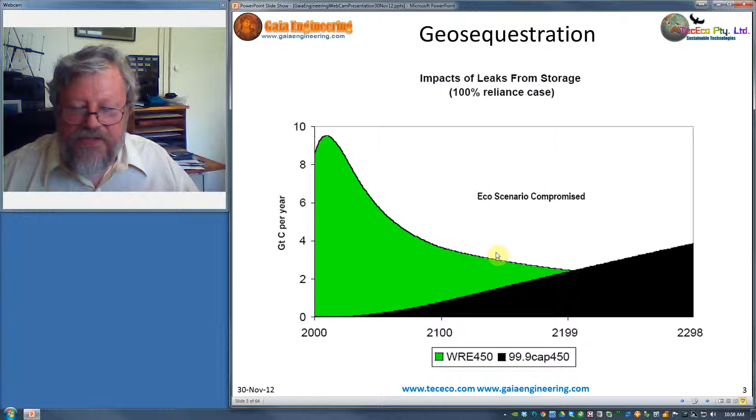As of 2011, according to Nature magazine, Peters et al., there are 33 billion tons of carbon dioxide emitted annually to the atmosphere from anthropogenic sources. Portland cement is a major contributor at 8.8%. Geosequestration does not look like it's going to work.

Leakage is the problem. I realized that the answer to the world's problems lay in an industrial ecology that utilized waste like CO2 and bitterns, desal wastewater or oil process water to create valuable products for the world's biggest market. By including the manufacture of not only TecEco patented carbonating cements but aggregates in the concept of synthetic carbonate building products, a solution to global warming could be found. TecEco have changed the technical paradigm in favour of making CO2 and other wastes resources.

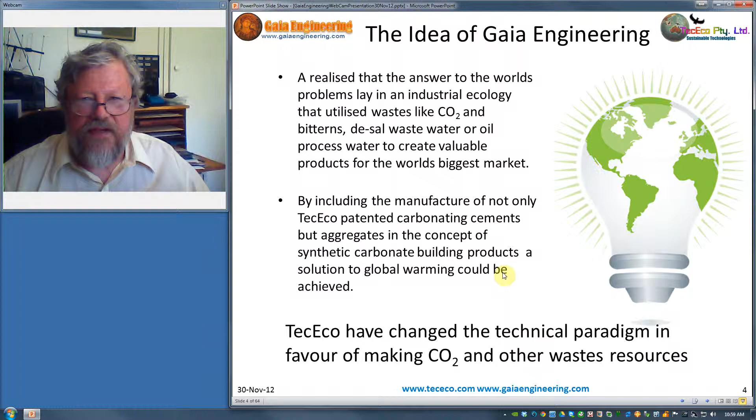I started back in about 1999. I was published by Fred Pearce in New Scientist in 2002. There is a way to make our streets as green as the Amazon rainforest. Fred should have referred to concrete. That's the only error in his work way back then, and the major change that we have made.

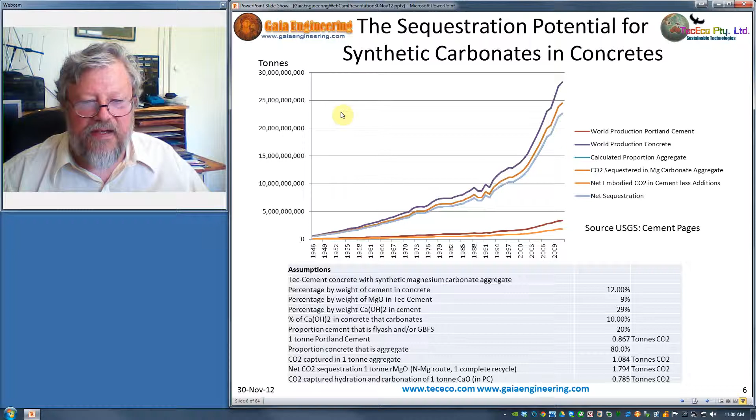Look at the potential. Over 20 billion tons, if you include aggregate, in our natural geomimetic process to produce man-made carbonate or synthetic carbonate. If all of concrete is synthetic carbonate, then the sequestration potential is absolutely enormous. You can almost solve the problem just like that.

A viable sequestration technology must be simple, scalable, have low upfront capital costs, low environmental impacts, produce saleable product into insatiable markets. Now, this is one area where we are different to all the other solutions. It must be easily implemented and deployable over a wide geographic area. Ideally, it should be symbiotic. It should conform with the rules of a good industrial ecology and address more than one of the major problems facing the planet. Utilize wastes from many sources and produce outputs that can be utilized.

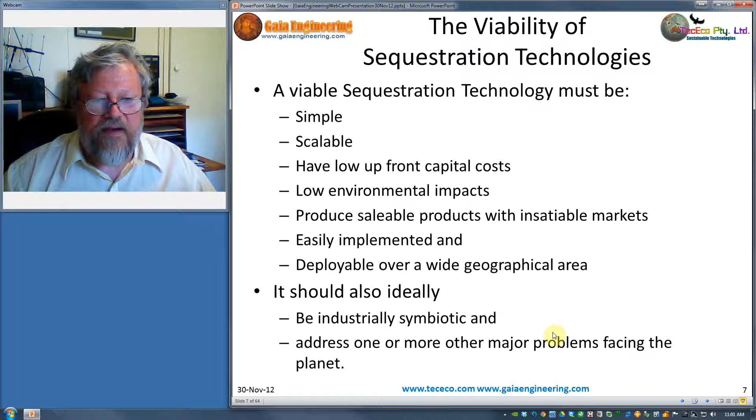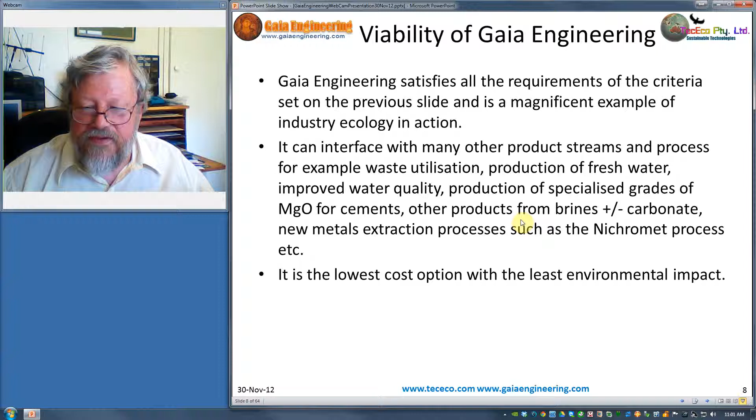The built environment represents what we do on this planet. It is large, an insatiable market for our product at the right price. Gaia Engineering can address other problems such as waste utilization and producing cleaner water. It achieves the maximum theoretical sequestration from concrete. Our Tec-Kiln and our Mg cements have patents or patents pending.

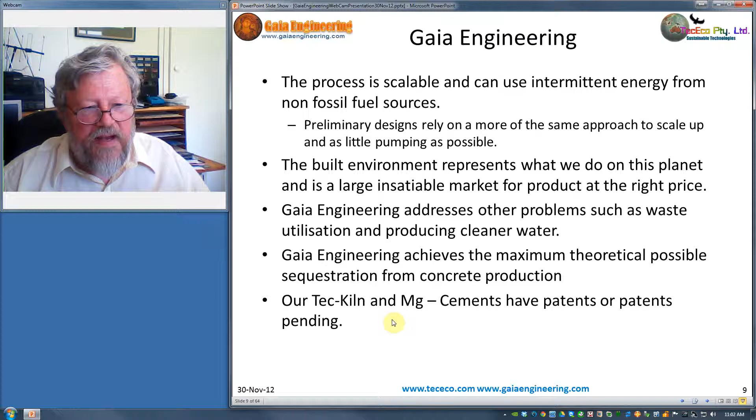It involves no mining, no transport, no grinding, and it does not utilize silicate like the other processes do. It's potentially much cheaper than these old processes. There are no wastes produced that cannot be used or recycled. Costs are not yet being developed, but they should be much, much lower because we don't have all that process.

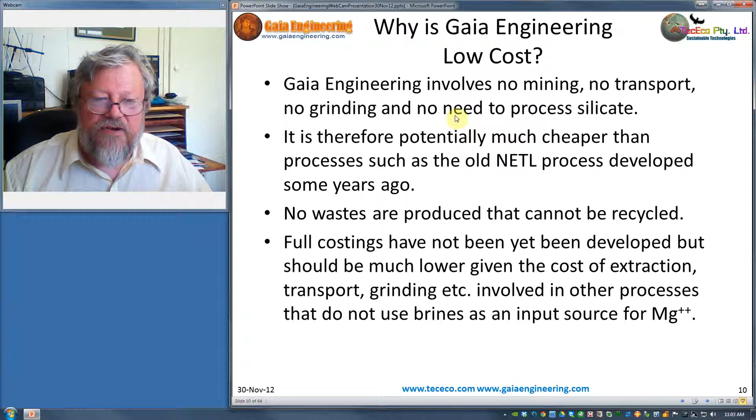Think for a moment about carbon sinks. Sorry, going back to that. There's no mining, no transport, no grinding, and there's no need to process silicates. That's the point.

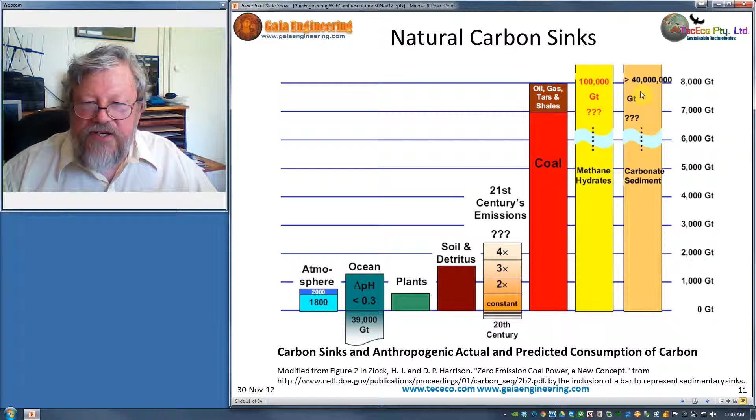Think about nature for a moment. The natural sink is carbonate sediment, over 40 million gigatons. They're permanent. We've got a choice, calcium or magnesium. We've gone for magnesium because of the low molecular weight. It's ideal for scrubbing CO2, and again, because of the low molecular weight, you can sequester more carbon dioxide.

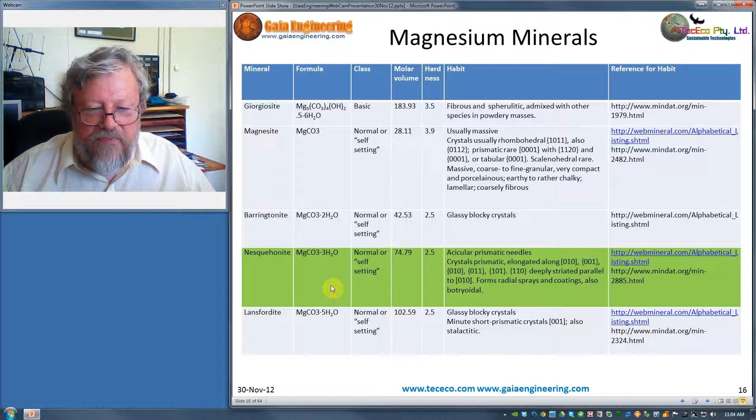It's the 8th most abundant element, and if we run out of waste like desal wastewater or oil process water, we can always use seawater because there's 1.29 grams of magnesium in every litre. Has low pH and polar bonds. Ideal. There are a lot of magnesium minerals. We've chosen nesquehonite. A lot of reasons for that. It can be manufactured in our N-Mg sub-process at room temperature.

There's significant molar volume expansion. Excellent morphology: long needle-like crystals that add to microstructure, and strength of a composite like concrete's all about microstructure. It can be used directly in acoustic panels, insulation, etc. It can be used as an input source for the manufacture of man-made aggregate. It's stable over a wide PT range. It's suitable for an input to manufacture MgO, our binder. It has low pH and polar bonds.

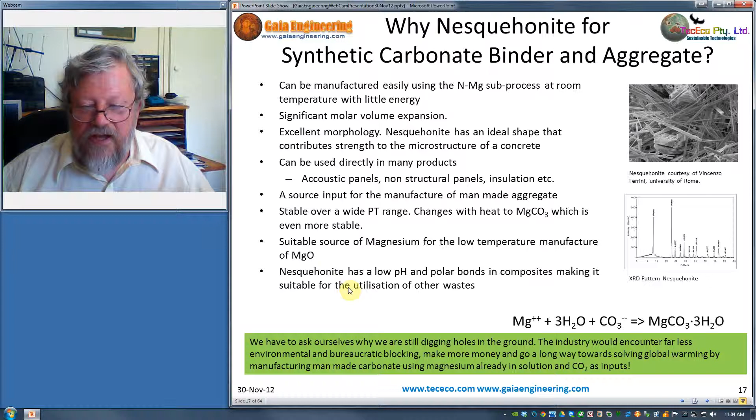My colleagues Vincenzo Ferrini, Silvano Mignardi and Caterina De Vito at the University of Rome, La Sapienza, have developed a process based on some early pre-World War II patents, and also on some recent publications in the 70s by scientists from the DOE.

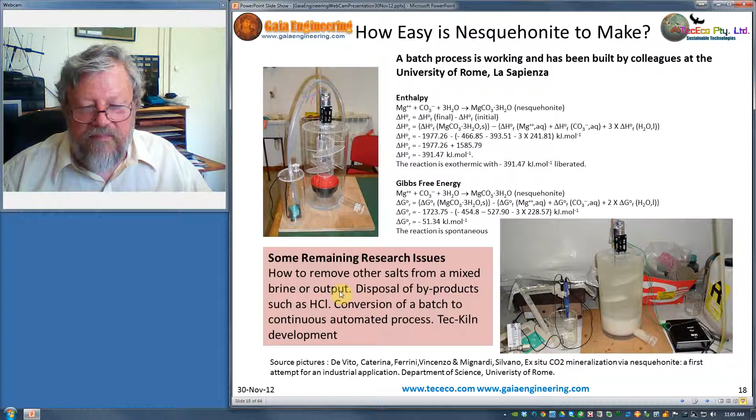We hope to convert this batch process into a continuous automated process, and we need to plug into, or plan to plug into that, our kiln for making our binders, to recycle the CO2 from the kiln back into the process. We need still to work out what we can do with other salts and how we can make them, what the ideal pHs are and conditions are, etc.

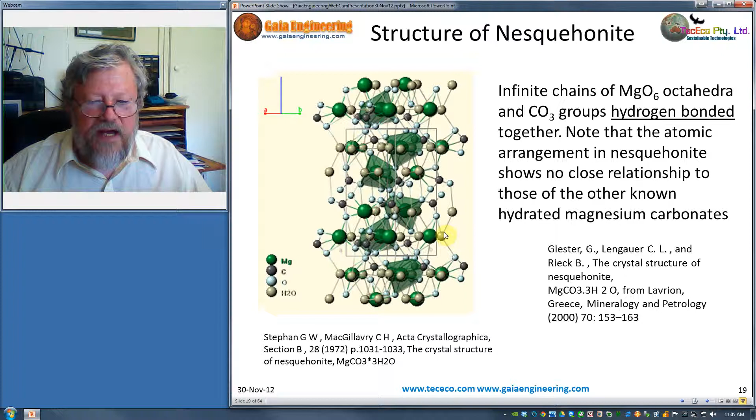A moment about the structure of nesquehonite. It's not like any other carbonate. It can hydrogen bond. There is a big case for manufactured aggregate, whether they be synthetic carbonates or made from fly ash or other wastes. Sand and stone are in short supply in some areas. In the case of nesquehonite, it's an ideal micro aggregate. It's also an ideal starting point for the manufacture of a synthetic carbonate aggregate, using MgO made from it as the binder and perhaps other wastes.

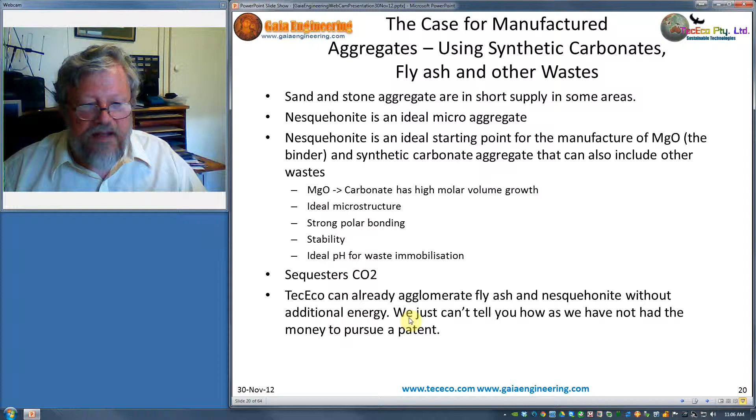MgO has high molar volume growth, ideal microstructure, bonding, stability, and an ideal pH regime. Sequesters CO2, and we already know how to agglomerate fly ash, but we're just keeping that a bit quiet at the moment. This is really a sort of school poster, but it just gives a very graphical representation of the concept. It's a little more interesting. It shows a sort of flow chart pictorially from waste to nesquehonite to cement to the manufactured built environment, and to manufacture building components, aggregates for the same purpose. Other wastes are also.

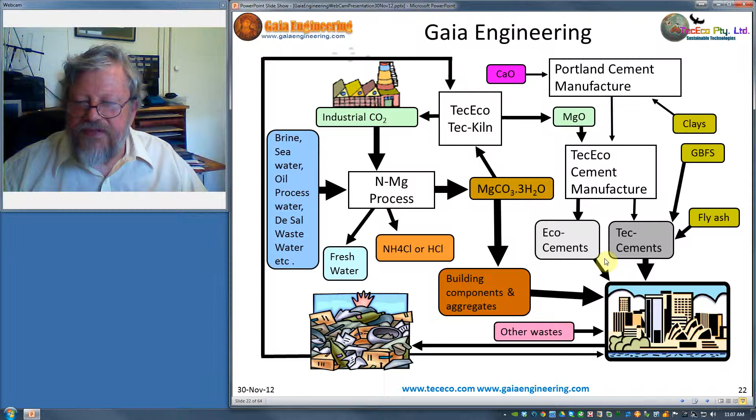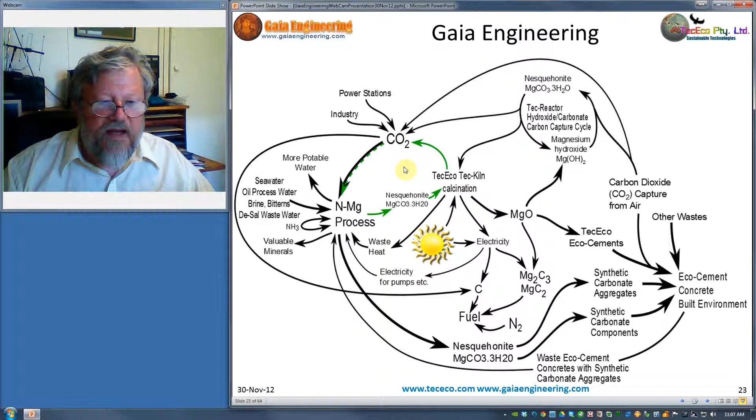This is the big picture concept. Gaia Engineering. There are a lot of sub-processes that I won't talk about today that we hope to plug in later. The N-Mg process is what's of importance at the present time. Before we move on to that, just a quick talk about thermodynamic cycles. Where we are at now with our eco-cements is that we don't capture CO2. That means basically we have a process energy, so they're not completely carbon negative. They're much lower carbon, but not carbon negative. If we can capture CO2 and put it in, then we have a giant CO2 capture thermodynamic cycle.

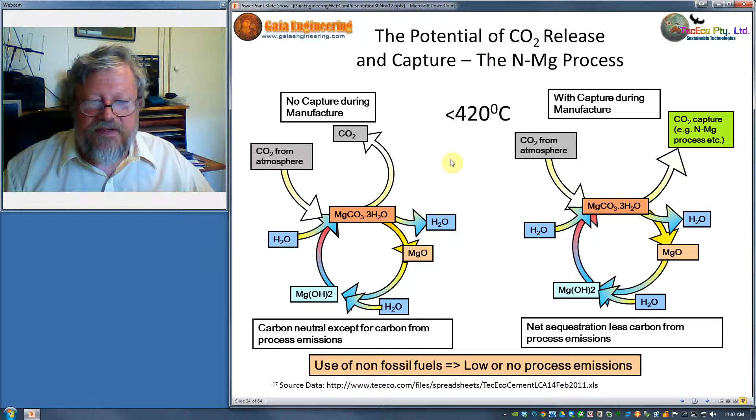There are 3 steps to the thermodynamics of that, as in the next diagram. Step 1 is capture of CO2 from industrial processes to make nesquehonite. Step 2 is the calcination. There are some small process emissions here. And step 3 is the recarbonation of our cements. Again, we absorb the stoichiometric amount. All up, over 1.75 kilograms CO2 per kilogram of our magnesium eco-cement. Talking about aggregates, step 1 only, over 1 kilo of CO2 per kilo of synthetic carbonate aggregate.

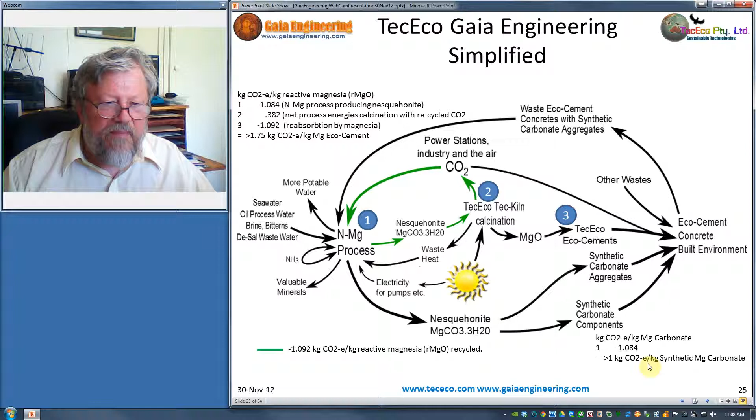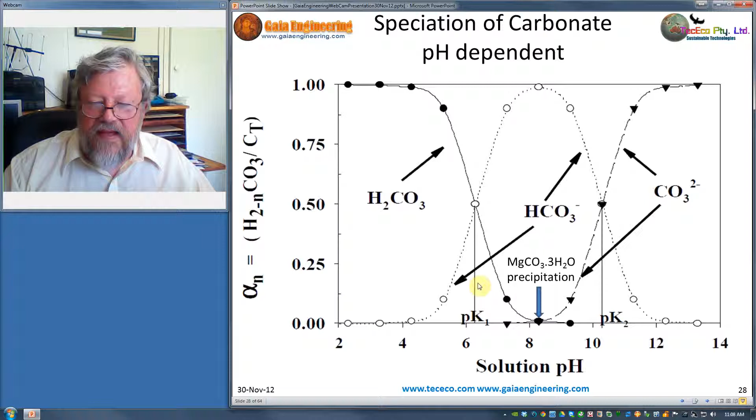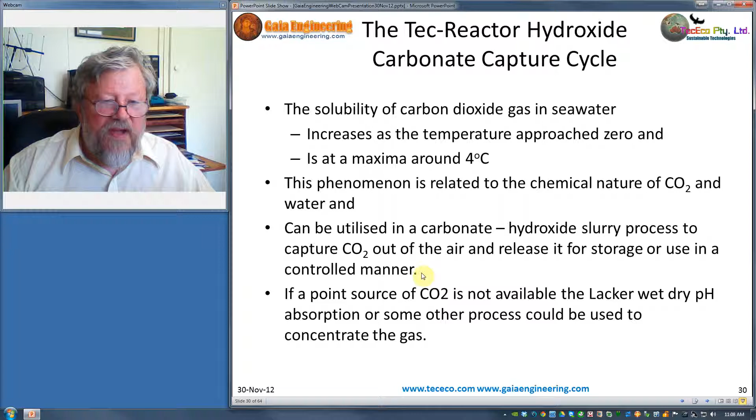Very like the Solvay process. Happens reasonably quickly, less than 10 minutes. Occurs at an easily achievable pH. The reactions are a bit complex, but you can study this later. We have lots of input plug-in side processes. Kiln is important, and I'll talk about that. It operates in a closed system and therefore does not release CO2 or other volatile substances to the atmosphere. It can be powered by non-fossil fuel sources.

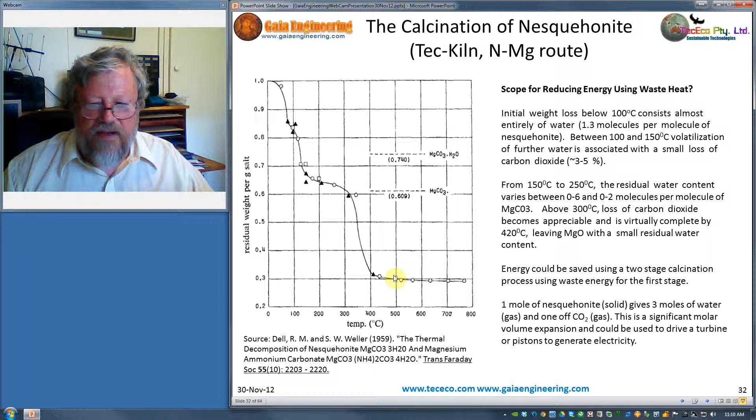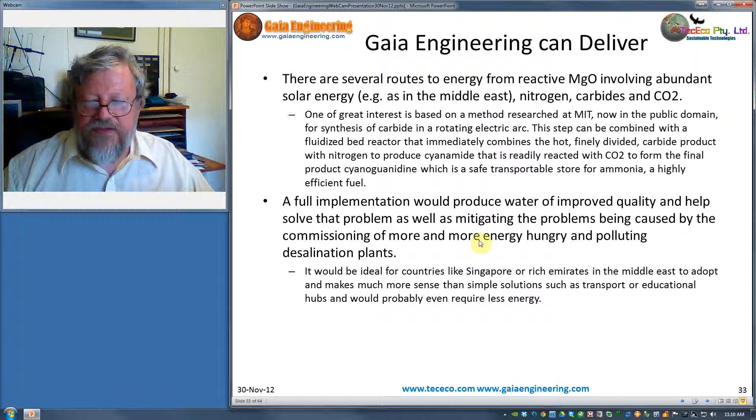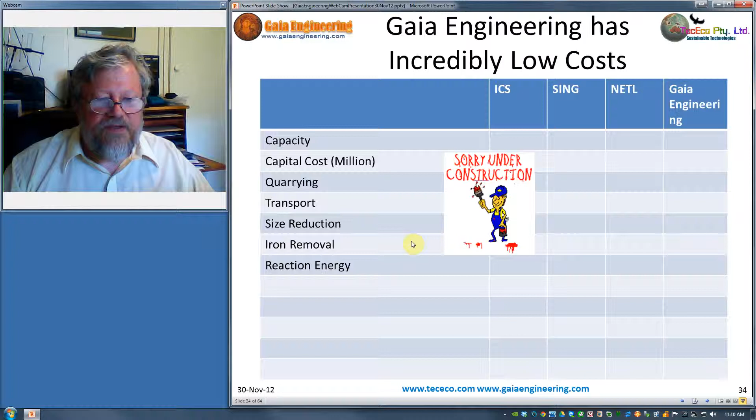There's several other outputs Gaia Engineering can deliver. Ultimately, there's a route to energy and fuels. There's also a route to fresher water. Sorry, our costings are still under construction. We're working on that, but we expect them to be at least half that of Portland cement, probably less. It's an example of a geomimetic industrial symbiosis. And finally, I'll talk to you about geomimicry.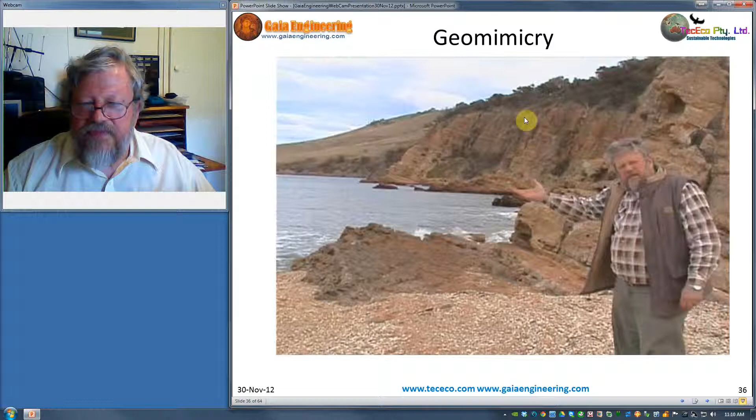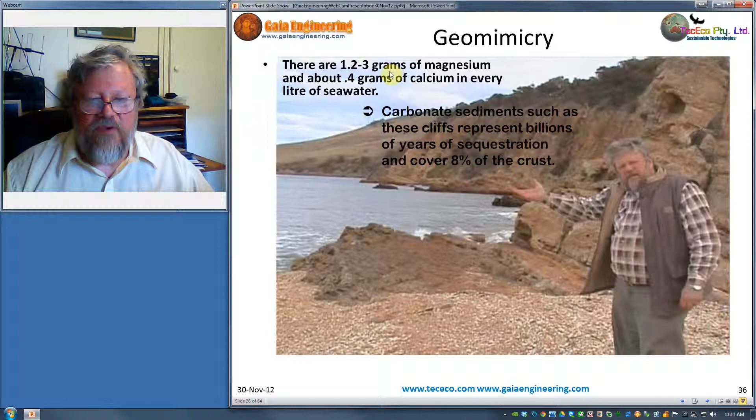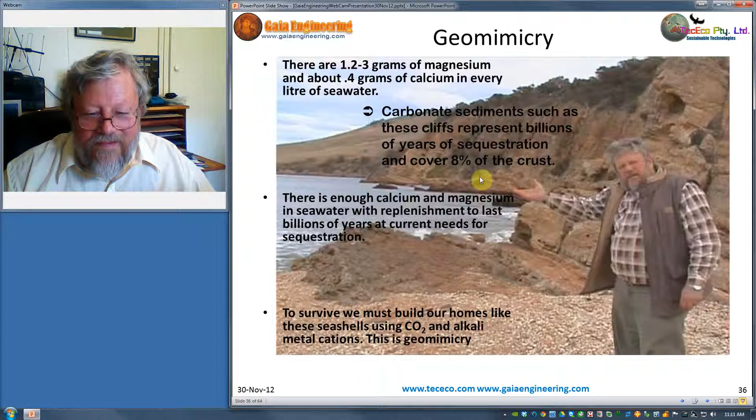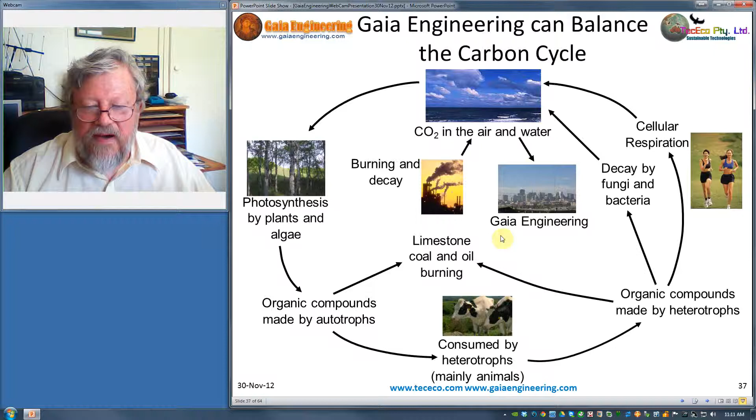TecEco today have patents or patents pending. We're in the chasm due to the GFC. There's been not so much interest in solutions. People talk more about the problem than the solutions. Help get us out of here. Please contact us. Show your dollars. We're keen to get on with it.